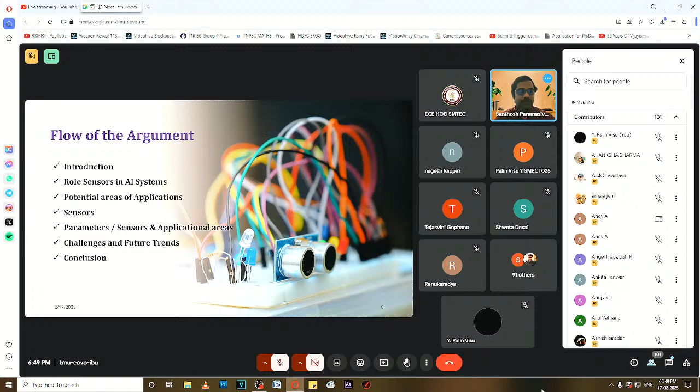So the first thing: in the era of AI, sensors play a very crucial role as a primary interface between the physical world and intelligent systems, right? They enable AI-driven applications by collecting real-time data, which is then processed, analyzed, and used for decision making. This is very similar to our five senses, through which our brain gets data and then synthesizes and analyzes the data and makes decisions. Sensors act the same way and are helpful for us as far as automation and other things are concerned.

What is a sensor, first of all? Sensors are devices that detect physical, chemical or biological changes and then convert them into measurable signals. Fine. The primary role of these sensors is data collection. Sensors provide real-time data essential for AI decision making.

So without sensors, whatever AI system we have, it will not be able to make any decisions, because we are very much aware that all AI systems, whatever they could be, need some input. Even though it has a trained database, it needs some input to check the data. So data collection becomes very, very essential, and sensors play a very crucial part in that.

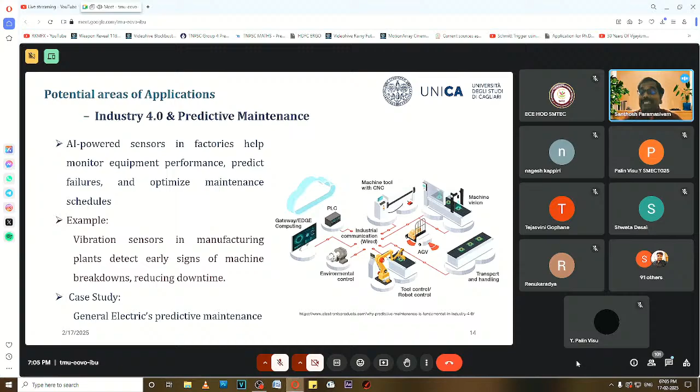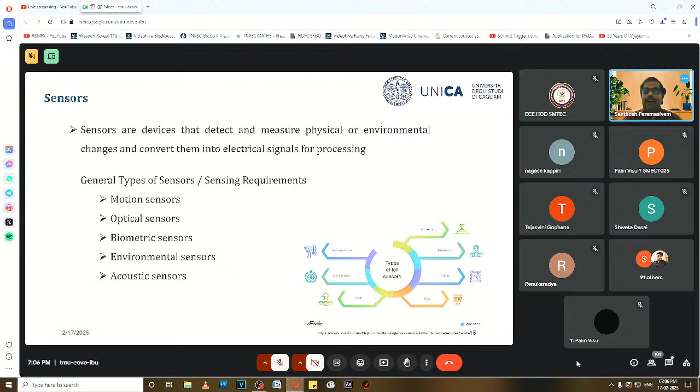So far we have seen the key areas of applications of these sensors integrated with AI. Now we are categorizing all sensors into these 5 major areas: motion, optical, biometric, environmental, and acoustic sensors. We will see what parameters are associated with these sensors and sensing applications, and what sensors we really use for this purpose.

The first is motion sensors. What do motion sensors detect? Is it just walking of a person, or no? No, it covers much more. The general sensors used for this purpose are accelerometer and gyroscope. These sensors were earlier used in flights, aircraft, and ships, but now they find applications in most areas, even in the cars we drive every day. The application has been extended and expanded to every area, which is why this comes as the first point.

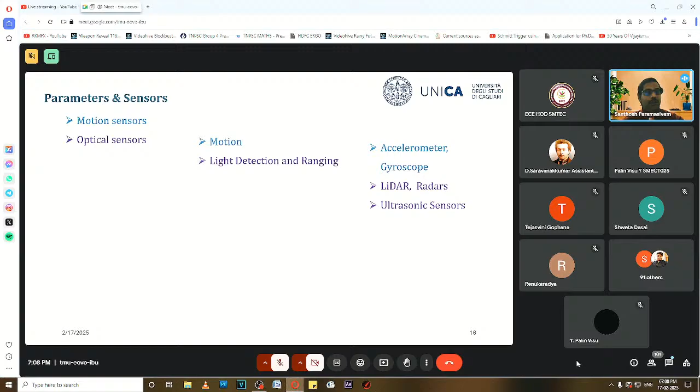The second is optical sensors. Optical sensors function through light detection and ranging. The sensors that come under this criteria are LIDAR and radar. The third is ultrasonics. Ultrasonics is used for ranging; it doesn't come under light, but for detecting ranging we use ultrasonic sensors.

Then the biometric sensors. Biometric sensors include facial recognition, fingerprint readers, and thermal readers. Thermal readers here refer to smartwatches and other devices where it detects your bodily temperature and other parameters.

That is what the thermal reader here means. General sensors which we use here are the fingerprint, iris, and ECG sensors. These are the three primarily used biometric sensors.

Then comes your environmental sensors. What are the parameters read by these environmental sensors? The common things are pressure, temperature, humidity, and chemical composition or chemicals. By chemicals, I mean the pollution part, air pollution and related things. Gas sensors are used in this case. So here comes the temperature sensor, the humidity sensor, and the gas sensor. These are the prime sensors which come under environmental monitoring, right?

And then are the acoustic sensors. When it comes to acoustic sensors, the prime thing it senses is sound. Here again, microphones and ultrasonic sensors come into picture in this area as well. So this is the general parameters or general areas which we have, and the sensors that are being used, and the parameters that are being measured. This generalized sensor purpose is given here.

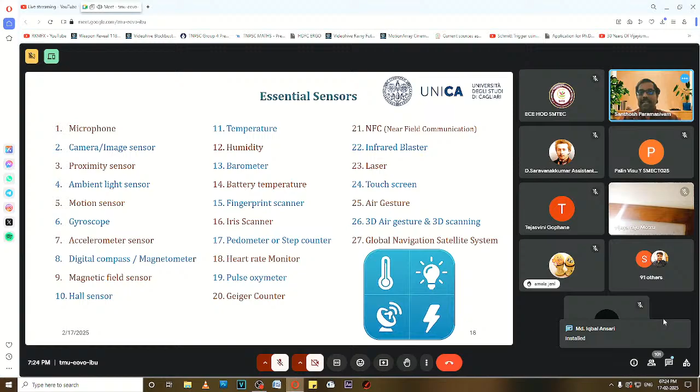Nice, nice, nice. Why I was asking you to do that is that these are the sensors that we have in our smartphones. So now you could imagine simply that these are the sensors which we have in our own smartphones, with which we will be able to develop any application. If you go there, you will find all the accelerometers, gyroscope, everything is there.

Please open the app and see.

So when you open the app, you would get a list of sensors that is there in your mobile phone. Maybe all the sensors listed here are not there in your mobile phone, but definitely you will see an accelerometer, a geomagnetic field, orientation, gyroscope, proximity, a gravity sensor, linear acceleration, rotation vector sensor, and a step counter.

Then your battery monitoring things. If you go there, you will know what is the temperature of your battery, what is the voltage, what is the status, whether it is charging, the health of your battery, as well as the type of battery that is being used in your mobile phone.

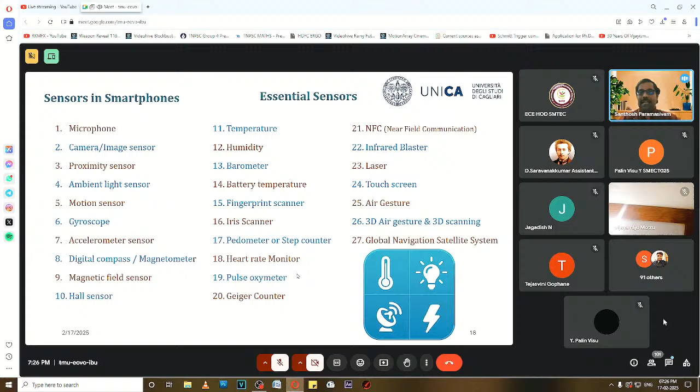The geomagnetic field will tell you what is the magnetic field around you, in your x-axis, y-axis, z-axis. Just move it near your laptop, you can see it will be higher. If you move it away, or when you are inside a Wi-Fi field, your magnetic field will be different. The field strength tells you what field you are in, whether the impact is going to be higher or lower. All these things you can analyze with this.

This is an ultimate tool which will tell you the various parameters around us. There are many other tools as well, but this one app will give you the exact details of everything. It gives you all the sensors in your phone.

Next, there would be a question. Now everything is okay, we have seen about the different sensors and how these can be used for different applications. We also saw some sensors which I myself have in my smartphone. But what is the use of these sensors? How can I myself use it? I know my phone is using these sensors to do all the required functions. How can I customize these sensors? I want to use it for myself, how can I do that? Is it possible for me to control my sensors, to make a modification with them? That will be the next question that comes to our mind. Is there any way we can do this? Yes, of course, there is a way we can control these sensors.

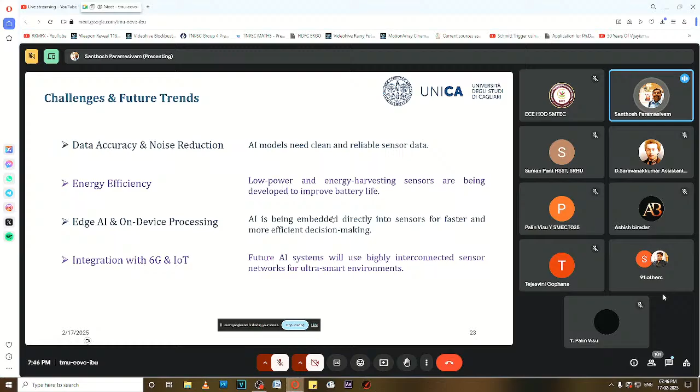Finally, coming to the conclusion of what we are trying to do. In this AI era, sensors are fundamental for enabling intelligent systems across industries. Their integration with AI is revolutionizing fields like healthcare, smart cities, industrial automation, and autonomous mobility. As sensor technology advances, AI-powered solutions will become more efficient, sustainable, and responsive to world challenges. This is the conclusion of today's presentation.

Also, we have seen different things today with which we ourselves can utilize the sensors which we have with us. In this I have not included your smartwatches, where you have more health monitoring sensors. There are more health monitoring sensors in your smartphones and smartwatches which I have not given here, but most of the functions your smartwatches are doing can be done with your smartphones itself. That you could have understood with the list of sensors which I have shown earlier.

Also this MIT App Inventor, if you see, there is a list of sensors. From there also you can identify that there are a lot of things that can be done with what you have. So my suggestion would be, try to use that, try to build your own applications, try to build your own AI systems, try to contribute yourself.

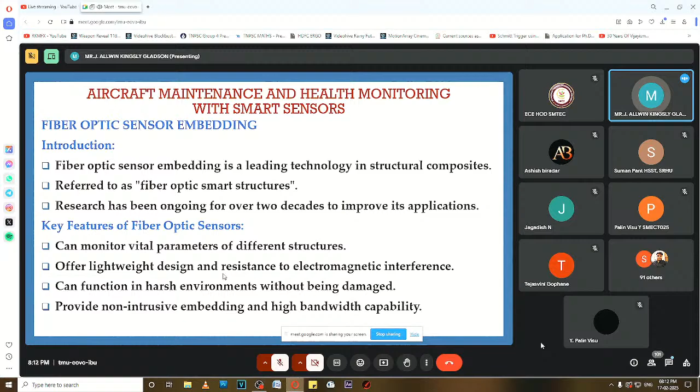The key features of fiber optic sensors are that they can monitor vital parameters of different structures. They offer a very lightweight design and resistance to electromagnetic interference. They can function in harsh environments, weather and climate conditions without getting damaged. They provide non-intrusive embedding and high bandwidth capability. The main advantages are high bandwidth capability and resistance to electromagnetic interference.

Its function is that it enables real-time health monitoring of the structure. It can be embedded during manufacturing or applied during operation. It works similar to human senses like hearing, seeing, smell, taste, and touch to detect structural conditions. All 5 senses we can use to detect the structural conditions of the aircraft. It provides instant data on the health, ensuring early detection of damage.

Because instant data, nanosecond response recording of the data, will help us to detect damage or failure as early as possible. Fiber optic sensor disadvantages: high fabrication cost makes them expensive to implement. They are very fragile in nature, which makes them prone to damage. Due to the fragile nature, on exposure to anything harsh, it will get damaged. So it will be embedded or safely placed in the aircraft structure.

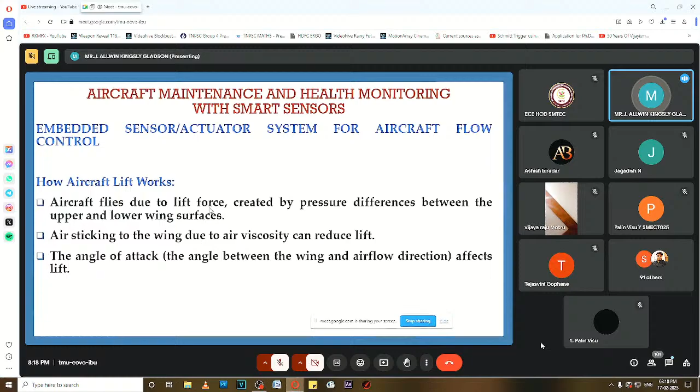Then, working of the aircraft. The aircraft flies due to the lift force. The lift force is created by the pressure difference between the upper and lower wing surfaces. Air sticking to the wing due to air viscosity can reduce the lift force. The angle of attack, meaning the angle between the wing and the airflow direction, affects the lift. Once again, the aircraft flies due to the lift force, created by the pressure difference between the upper and lower wing surfaces. Air sticking to the wing due to air viscosity can also reduce the lift force. The angle of attack affects the lift.

The next one is flow separation, the embedded sensor for aircraft flow control. At low speeds and high angle of attack, air separates from the wing, reducing the lift. At very low speed, if the angle of attack is very high, air separates from the wing, reducing the lift. Unsteady airflow during maneuvers can cause early flow separation, leading to loss of lift. Flow separation affects aircraft performance and safety, making it essential to predict and detect.

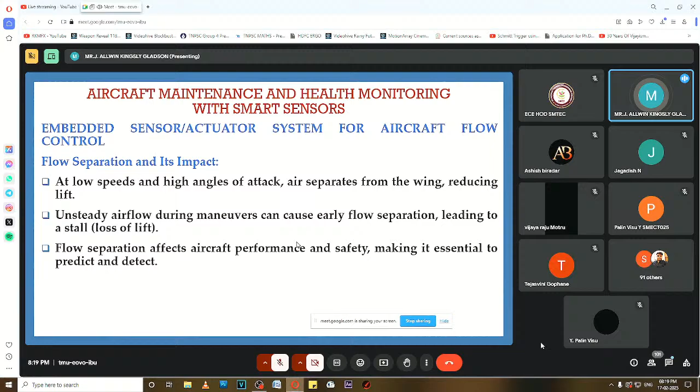So we have to detect early whether the correct flow is happening at the wing to lift the aircraft or not. Flow separation is monitored with network-based pressure sensors embedded in the wing. They measure pressure fluctuations to detect flow separation. These pressure variations are analyzed using the root mean square value of the signals from the sensors. These signals increase in laminar separation bubbles and decrease after reattachment. Initially it increases, and after reattachment it decreases.

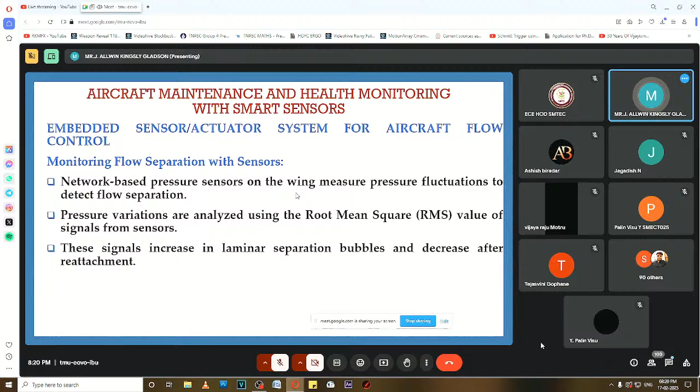Then, embedded sensors for aircraft flow control. The experiment setup used the ATR 72 aircraft, a twin-engine regional airliner, for testing the airflow over the wings. CFD, computational fluid dynamics simulations, help determine optimum sensor placement, that is, which area of the wing we have to place the sensor to get correct flow separation data. Results were validated using a standard airfoil cross section, a standard aircraft wing design.

Then, capacitance-based pressure sensor design, used for aircraft flow control. Capacitance-based pressure sensors were chosen for their very low cost and large area coverage. The sensor design used a deformable membrane and a movable electrode, both placed on a copper clad polyimide layer. Finite element method simulations were used to analyze sensor deflection and stress distribution.

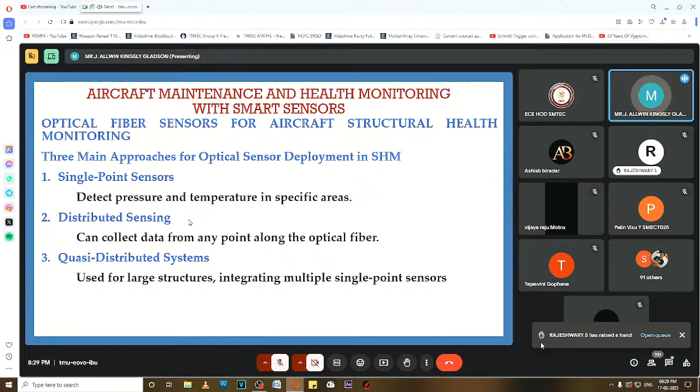The three main approaches for optical sensor deployment in structural health monitoring are single point sensors, distributed sensing, and quasi-distributed systems. Single point sensors detect pressure and temperature in a specific area. In distributed sensing, it can collect data from any point along the optical fiber. Quasi-distributed systems are used for very large structures, integrating many single point sensors. These are the three main approaches in structural health monitoring using optical sensors.

The next one is sensors in electric vehicles. There are battery powered electric vehicles, called electric vehicles, and hybrid electric vehicles, which have more than one source of energy used to drive the vehicle. What are the sensors used in electric vehicles? Position sensors, speed sensors, temperature sensors, and pressure sensors. Some electric vehicles use a very small engine only to charge the battery. Therefore, it will reduce the number of sensors to be used.

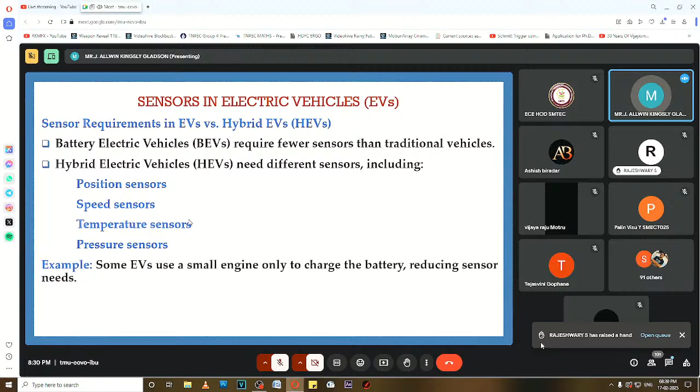Common sensors on electric vehicles are temperature sensors, voltage sensors, and current sensors. The temperature sensor is used to monitor the heat of the battery and the motor. The voltage sensor is used to measure the power levels of the battery. And the current sensors track the electrical flow in the system.

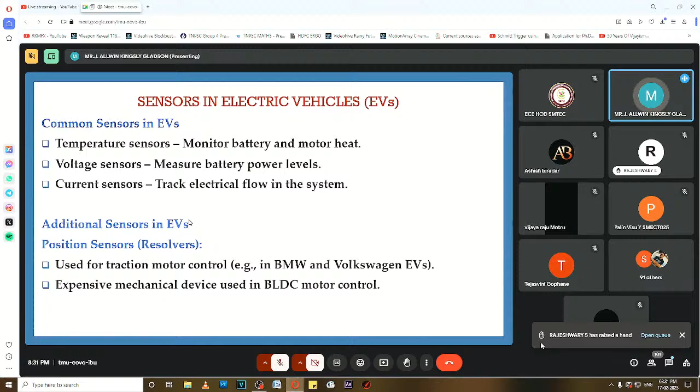The additional sensors in electric vehicles are position sensors, called resolvers. They are used for the traction motor, so the motor can be controlled. For this, we can use position sensors. For example, BMW and Volkswagen electric vehicles use this position sensor. It is an expensive mechanical device used in brushless BLDC motor control systems.

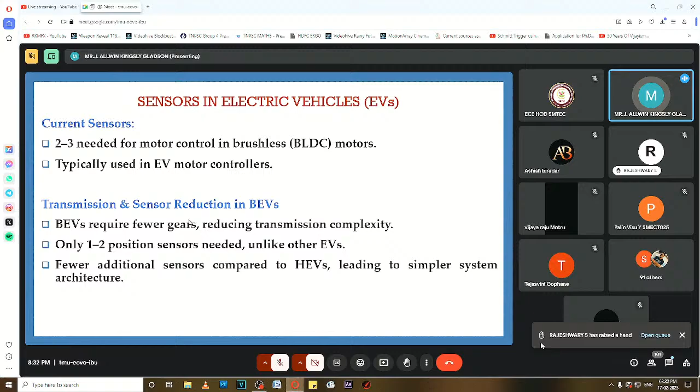Current sensors: a minimum of 2 or 3 sensors are needed for motor control in brushless BLDC motors. They are used in electric vehicle motor controllers. Transmission and sensor reduction in BEVs, battery powered electric vehicles: they require fewer gears, reducing the complexity of the transmission. Only 1 or 2 position sensors are needed. Fewer additional sensors are needed compared to hybrid electric vehicles, leading to a simpler system architecture.

Position sensors in automotive systems. What is the purpose of position sensors? They are used to measure mechanical angular motion and convert it into electrical signals. They are designed to work in the harsh environmental conditions found in automotive systems. Based on the electrical signals, the position of the wheel and the motor is determined.

Types of position sensors: rotary position sensors, also called angle sensors, measure rotational movement accurately. The common sensor used for motor control is the resolver. It is used for precise motor position tracking, to know what position the motor is in now. The next one used for motor control is the encoder. It converts the motion of the motor into digital signals and passes the signals to the control system of the motor.

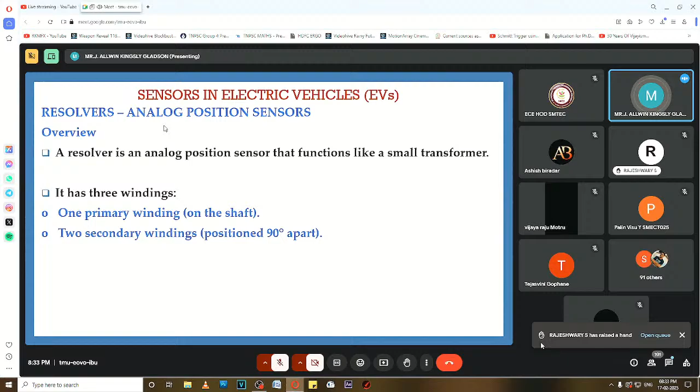Purpose of the resolver. This is called an analog position sensor. It functions like a small transformer. It has 3 windings: one primary winding, located on the shaft, and 2 secondary windings positioned 90 degrees apart from each other. Its working principle: it measures the shaft rotation by calculating the turns ratio and polarity between the coils.

It functions like a rotary transformer. It detects angle variation when the shaft rotates. It uses an AC reference voltage to excite the coils at a constant frequency. The output frequency from the stator and rotor remains the same, but differs in phase by 90 degrees. It generates sine signals and cosine signals, where the voltage depends on the reference voltage and the shaft angle.

It uses AC reference voltage to excite the coil at a constant frequency. The output frequency from the stator as well as from the rotor remains the same, but differs in phase by 90 degrees. It generates sine and cosine signals, where the voltage depends on the reference voltage and the angle of the shaft.

Then encoders - these are motor position sensors. What are the different types of encoders? First is the absolute position encoder, and the second is the incremental encoder with the reference mark.

In the absolute position encoder, it uses a disk with a specific binary pattern. If it is a 3-bit output, it has 8 pattern positions. It is useful when power turns on and off intermittently during operation. Then we can use this absolute position encoder.

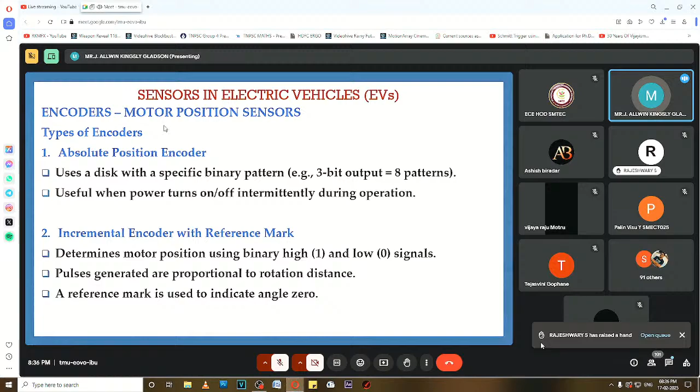Then the incremental encoder with the reference mark. The previous one is the absolute position encoder; this one is the incremental encoder with the reference mark. It determines motor position using the binary high and low, 1 and 0 signal. The pulses generated by these encoders are proportional to the rotational distance. A reference mark is used to indicate angle 0 in this sensor.

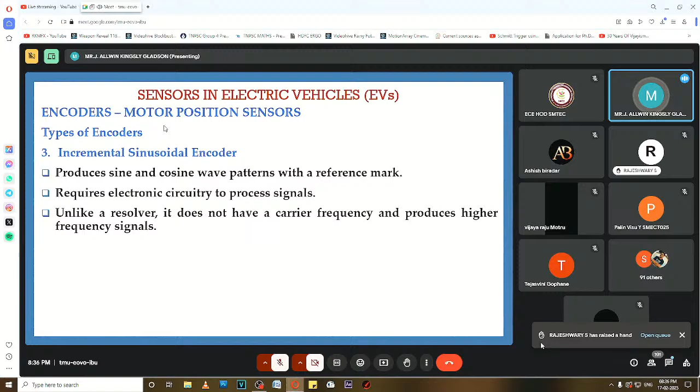The last one is the incremental sinusoidal encoder sensor - this is also a motor position sensor. It produces a sine wave pattern and a cosine wave pattern with a reference mark, the 0 mark. It requires an electronic circuit to process the signals. Unlike a resolver, it does not have a carrier frequency; it produces only higher frequency signals.

The next sensor in electric vehicles, apart from motor position sensors, is the battery monitoring sensor. It is essential for electric vehicles. It monitors battery health and state of charge, the charge level. It is typically used with 12-volt lead acid batteries.

The key components of these battery monitoring sensors are analog devices; the second is the shunt resistor. These sensors are placed on the battery module for real-time monitoring. Three main measurements are taken with the help of the sensors from the battery: first is voltage, the second is current, and the third is temperature.

For voltage, each battery cell has a voltage measurement chip. It is most critical.

Next is current - the current is measured using shunt resistors or open loop Hall sensors. Then temperature is measured using NTC thermistors, the negative temperature coefficient thermistors.

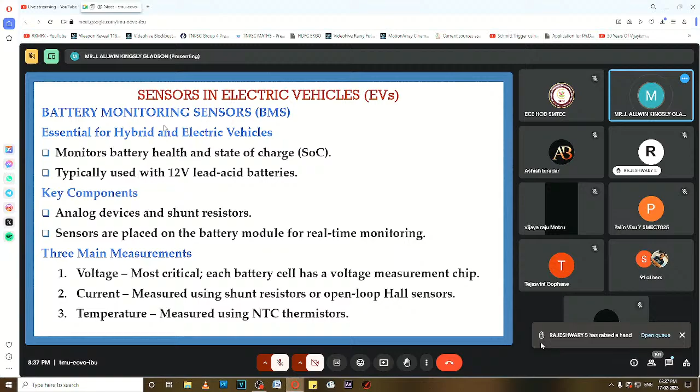Then MEMS technology in automotive vehicles. It is widely used in modern vehicles. MEMS technology is used in airbags and vehicle stability control. The four main types of MEMS-based sensors are: first, accelerometer; second, gyroscope; third, inclinometers; and fourth, flow and pressure sensors.

What does accelerometer mean? It detects motion and impact - the movement of the vehicle, motion surrounding the vehicle, and the impact of a surrounding body with the vehicle. Then gyroscopes measure vehicle rotation and stability, such as during turning or steep turning, when the vehicle goes at high speed around a curve.

Then inclinometers detect tilt and angle changes in the vehicle. Then flow and pressure sensors monitor fluid movement and air pressure - fluid movement meaning fuel flow as well as brake oil flow and engine oil flow.

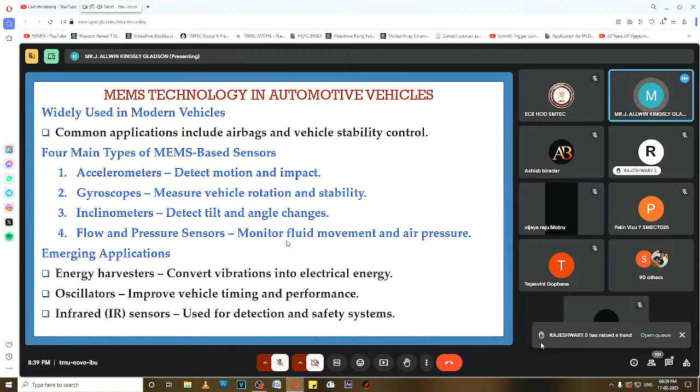Next is MEMS-based sensors for passenger safety. For the prevention of collision, we have to deploy the airbag. For the deployment of the airbag, we use this MEMS-based sensor. It detects rapid changes in vehicle acceleration and automatically deploys airbags to reduce the impact. Then, MEMS based accelerometer in airbags.

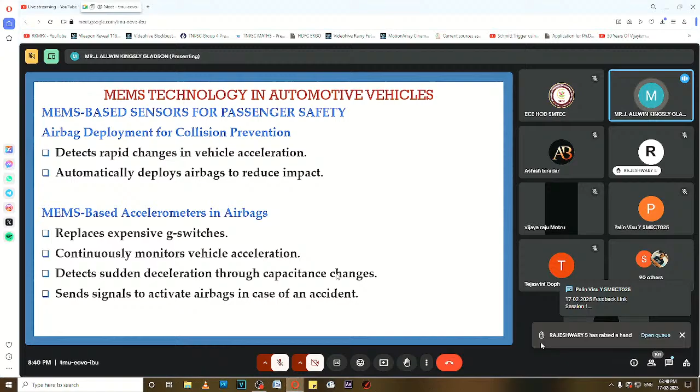In traditional methods, G switches activate the airbags, but this MEMS-based sensor replaces the G switches. The accelerometer continuously monitors the vehicle acceleration and detects sudden deceleration through a change in capacitance value. If the capacitance value changes, it detects the sudden deceleration and sends a signal immediately to activate the airbags.

Use of the MEMS gyroscope: this MEMS-based sensor is used for skidding and rollover reduction. To avoid rollover of the vehicle and skidding, we use this MEMS gyroscope. It measures the angular velocity of the wheel and helps maintain the vehicle's orientation with the surface of the road as well as the wheel of the vehicle.

Its working principle is based on the conservation of momentum. This MEMS micro gyroscope works on this principle and is commonly used in trucks for rollover reduction, hence improving vehicle stability and safety.

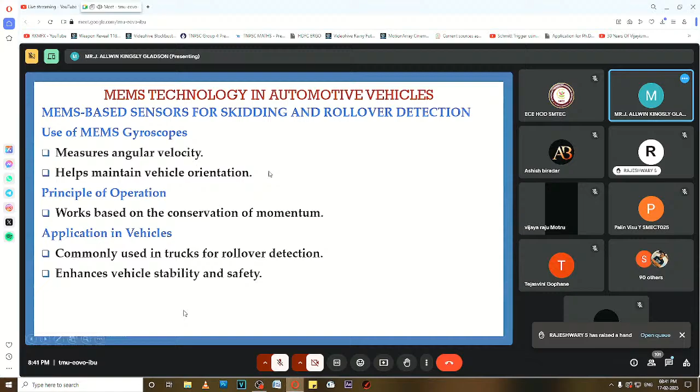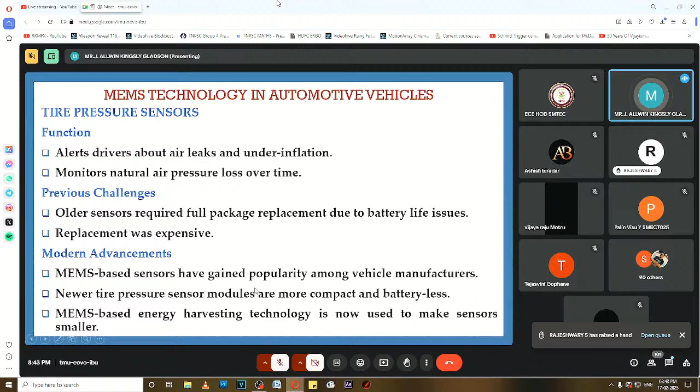The challenge with older sensors was full package replacement due to battery life issues, since the sensors were operated by battery. If the battery life expired, the whole sensor system had to be replaced, which was very expensive. In modern advancement, MEMS-based sensors have gained popularity among vehicle manufacturers because the newer tire pressure sensor modules are more compact and battery-less—they do not use any battery and are very small in size. This MEMS-based energy harvesting technology makes the sensor smaller since no battery is used, and it is gaining more popularity in tire pressure sensing.

Then there is electronic stability control of the vehicles. Why is it important to use electronic stability control? It helps drivers maintain stability and control during a sudden movement or jerk of the vehicle.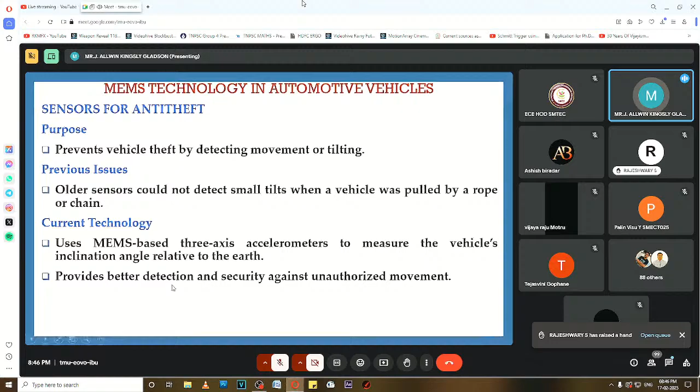But current technology uses MEMS-based 3-axis accelerometers to measure the vehicle's inclination angle relative to the earth, providing better detection and security against unauthorized movement.

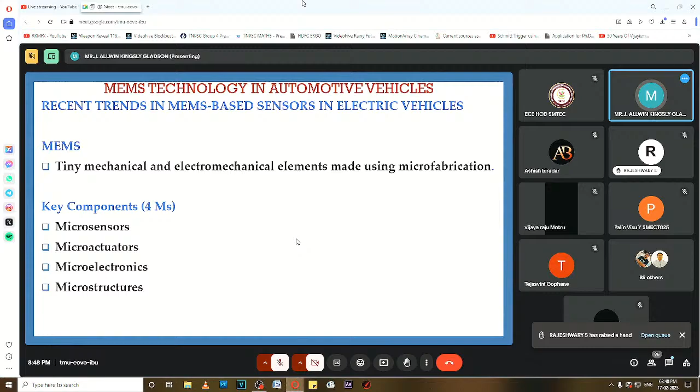MEMS: tiny mechanical and electromechanical elements made using microfabrication, called MEMS. Key components are the 4 M's: one is microsensor, another is micro actuators, third is microelectronics, and the fourth is microstructures. The benefits of MEMS technology are very low cost, high reliability, and better performance than other microscopic sensors.

Role in electric vehicles and hybrids. Role of MEMS technology in electric vehicles: it converts mechanical signals into electrical signals. It is mostly seen in complex sensor integration, therefore it is mostly seen in high-end model cars only.

Why do we need to monitor batteries? Charging and discharging causes electrical and mechanical changes in the battery. While charging and discharging, electrical and mechanical changes happen in the batteries. Due to these changes, the battery can fail. So to prevent this failure, we use MEMS in the battery monitoring system.

Common battery failure causes are malfunction in electronic components, overheating during charging, and connector failures. Malfunction in the electronic components will cause the battery to fail. Overheating during charging also causes the battery to fail. The connector between the battery and the power source also makes the battery fail.

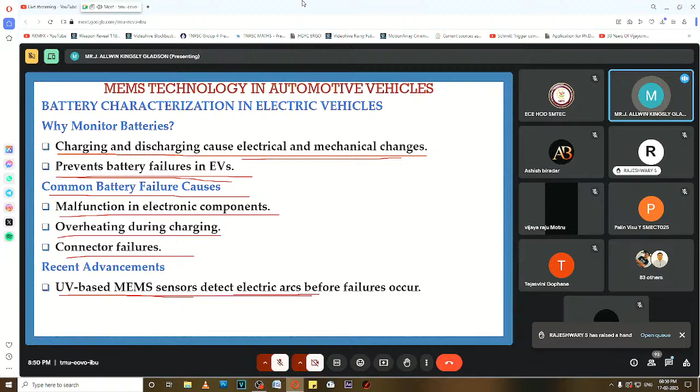The future of EVs: EVs are the future market and replacement for conventional vehicles. They help reduce greenhouse gas emissions and global warming.

Sensor-based technologies in EVs: various sensors are used in EVs. Some sensors are also common in conventional vehicles. This MEMS-based sensor - new micro-fabricated sensors are being developed for electric vehicles.

These MEMS-based sensors in electric vehicles are used for motion sensing, battery monitoring, and energy harvesting. This sensor will reduce the cost, save space, and improve sensing capabilities.

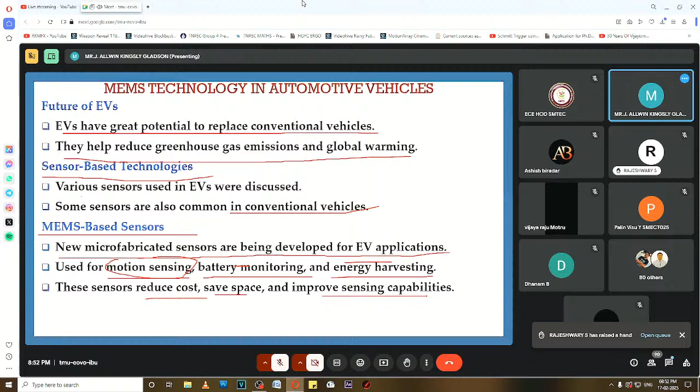Sensors used in automobile manufacturing. An automobile manufacturing shop is called an assembly shop, and it has sensor integration. Importance of the assembly shop: it converts the vehicle frame into the final product. Initially only the vehicle frame is present, and finally it is converted into the final product. This is one of the most crucial parts of automobile manufacturing.

There is high cost investment in equipment, because flexible manufacturing system machinery, robots, and automation process can be more expensive than the final product.

The role of the sensor in assembly is to protect equipment from damage, because automation equipment moves in precise motion with each other, so it should protect equipment from damage.

It ensures smooth and efficient processing. For automation, smooth and efficient processing is needed, and that needs sensor integration. The assembly shop has one station integrated with another station, and one automation machine integrated with another machine. So for correct integration, sensors are used.

Smooth and efficient processing also helps maintain high quality standards through automation.

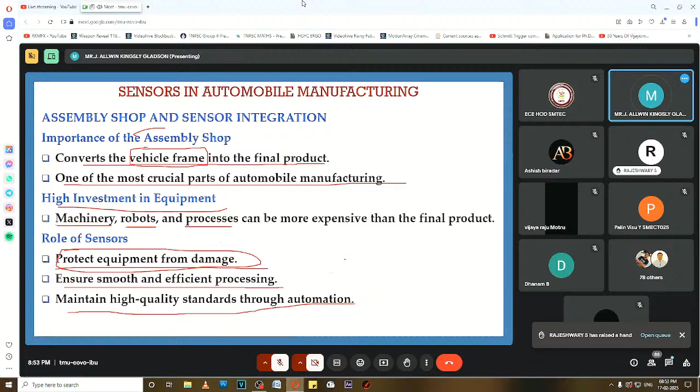An assembly line is a production process where manufacturing is divided into a number of sub-steps. Each step follows a fixed sequence to ensure the product becomes a final product. The product moves from one workstation to another workstation for different tasks.

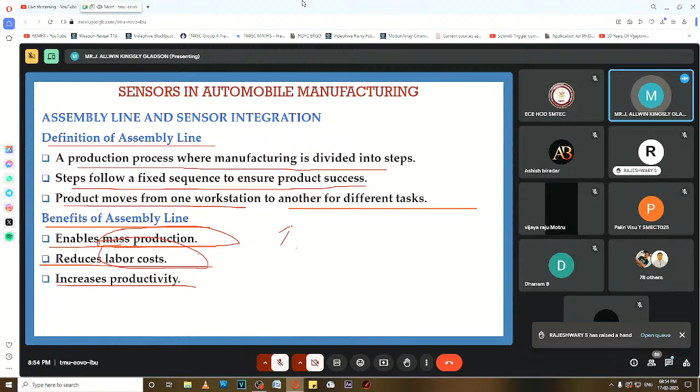Benefits of the assembly line: it enables mass production, reduces labor cost, and increases productivity. At one point of time, more parts and more vehicles can be manufactured. With the same labor, using mass production we can increase the number of vehicles and also increase productivity.

In assembly line and sensor integration, another factor is automation and optimization. From one station to the next, products or components must be moved, so we use conveyor belts. Conveyor belts reduce vehicle production time, since they move parts or components from one station to another. The process is divided into multiple steps for efficiency.

Movement of parts via conveyor belts reduces human usage. Therefore, automation reduces health risk and improves the productivity of the component.

Role of sensors in modern assembly lines: it is essential for balancing human and automated systems, because the assembly line consists of different workstations. At workstations 1, 2, 3, there will be human beings, and these humans and machines should be balanced and coordinated equally based on sensors on the machines. The human must react or perform operations in the assembly line.

Sensors also optimize material handling and energy usage. Optimizing material handling means that once an operation or task is completed, the conveyor carrying the component moves to the next workstation. When the operator places the finished task at the sensor location, the sensor sends a signal and the conveyor moves to the next workstation.

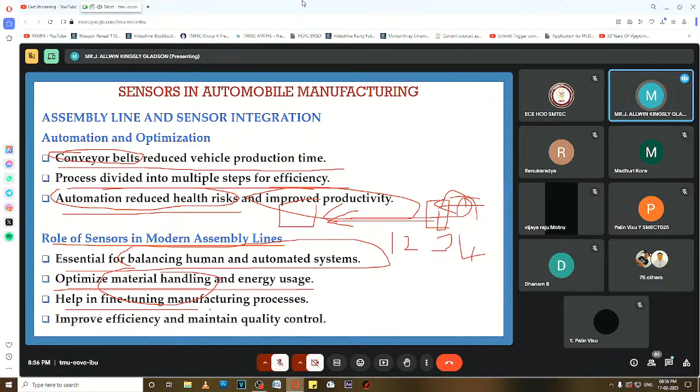This optimization of material handling helps in fine tuning the manufacturing process, meaning various operations are carried out simultaneously on a particular component using different tools. For example, a first tool, second tool, and third tool must not interfere with or disturb each other. This fine tuning of the manufacturing process is achieved with the help of sensors.

This improves efficiency and maintains quality control. If it balances human and automated systems, efficiency automatically increases. If it optimizes material handling, efficiency automatically increases. If it fine tunes the manufacturing process, quality automatically improves.

Importance of the assembly line: it is very essential for mass production in the automobile industry. It helps manufacturers work cost efficiently by moving through different processes, reduces the need for skilled labor, increases efficiency, and reduces production time and cost.

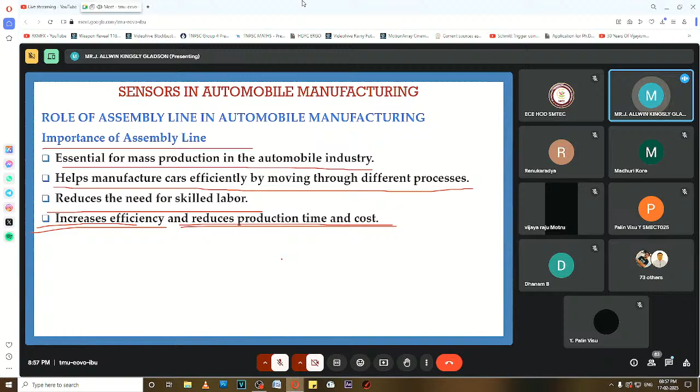Role of the assembly line: the main sections of the automobile assembly line are the body shop, paint shop, and assembly shop. In the body shop, main vehicle components are manufactured, including processes like casting, sheet metal work, pressing, and welding. In the paint shop, components are painted as per requirements. First, in the body shop, components are manufactured using these manufacturing methods.

These are the manufacturing methods. Then paint after the body shop, the parts are manufactured. It is painted in the paint shop, and in the assembly shop, final assembly of the vehicle takes place.

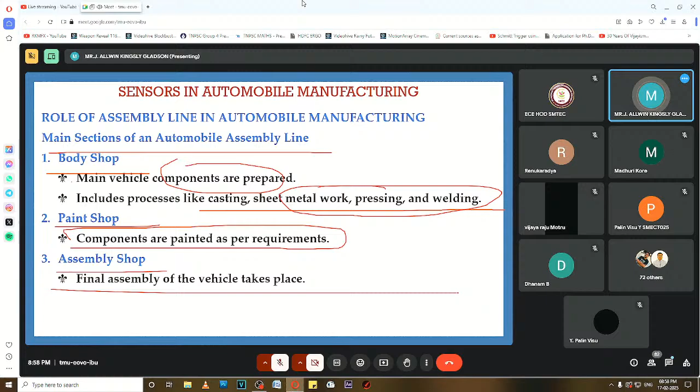The next one is the assembly line. Types of lines in the assembly shop: first is trim line, second is chassis line 1, third is chassis line 2, and the last one is final line.

What is the role of sensors in the assembly line? Sensors are used for integrating different sub-assemblies. It ensures proper alignment and functionality of the components. The proper alignment of components is done with the help of sensors only. If it is properly aligned, the function of the components will work properly, reducing defects and rejection in final inspection.

If it is using a sensor-based tightening and nut tightening system, and a sensor-based press fitting system, this also helps in the final inspection, so the number of component rejections will be very less due to this sensor-based assembly line system.

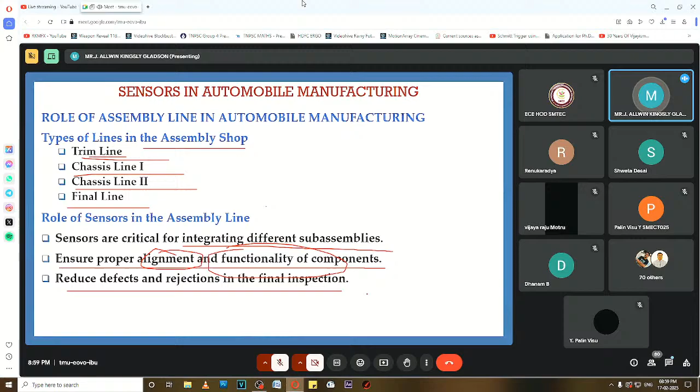Next is the first stage, the trim line, in the assembly shop. Here the vehicle arrives from the paint shop. Several sub-assemblies like brakes, console box, cabin lamp, and door assemblies are prepared here.

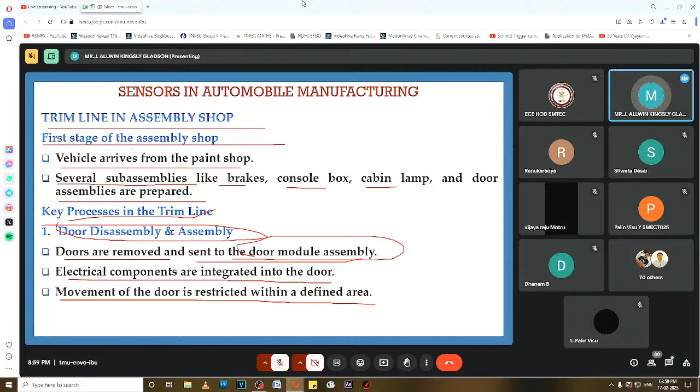Key process in the trim line: the first process is door disassembly and assembly. Doors are removed and sent to the door module assembly. Electrical components are integrated into the door, and movement of the door is restricted within a defined area.

Then the second key process in the trim line is dashboard installation. The dashboard is selected from the lot in the nearby storage area and installed in the vehicle.

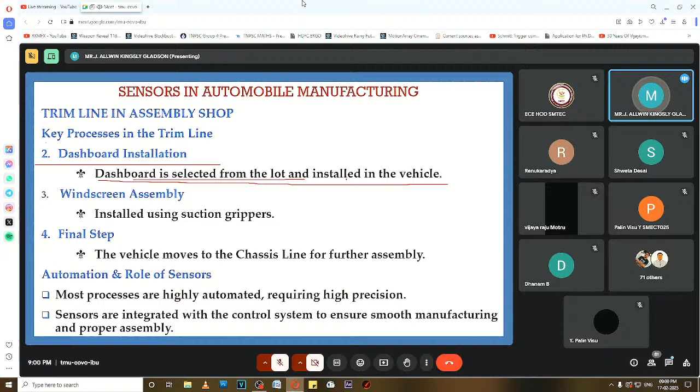Then windscreen assembly is installed using suction grippers. The windscreen, the front window of the car or vehicle, is installed using suction grippers. By the vacuum grippers, the windscreen is held secured and fit on the front of the vehicle, located securely in the proper location with the help of sensors.

The final step: the vehicle moves to the chassis line for further assembly.

The role of the sensor here is that most processes are highly automated, requiring high precision. In the assembly line process of automobile manufacturing, it is highly automated, meaning the machine with various limbs and arms moves precisely. For precise movements, we need these sensors so that parts will not collide with each other, and at the same time, they should be properly located.

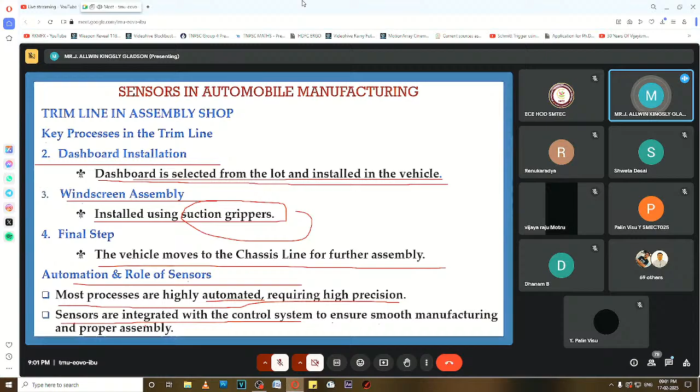Sensors are integrated with the control system to ensure smooth manufacturing and proper assembly.

Then the code reader in the assembly process. What is the purpose of the code reader? Its main function is to read coded tags to match the different assemblies of the vehicle.

Each sub-assembly or component has a different coded tag. You have to read and understand the particular code for the particular component, and ensure the correct placement of that component in the sub-assembly of the vehicle. Therefore, the main function of the code reader is to identify the particular component and correctly place it in position within the sub-assembly with the help of the sensor.

Use of one-dimensional and two-dimensional tags prevents confusion by labeling components with unique codes. Each and every component has a unique code, and by reading that tag, we can identify the components without any confusion.

Its working principle uses light absorption techniques, based on the difference between black and white colors. In a barcode reader, white reflects most of the light while black absorbs most of the light. A patterned tag of black and white reflects light in a specific way, allowing easy decoding, which helps identify and understand the component.

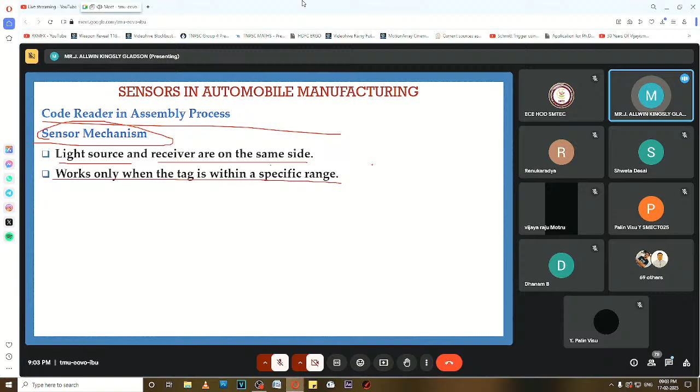The code reader in the assembly process uses a sensor mechanism. The mechanism consists of a light source and a receiver on the same side. It works only when the tag is within a specific range from the light source.

Then the inductive sensor in the assembly process.

This inductive sensor, the main function is it detects and monitors the position of the components. It detects as well as monitors the position of the components. It is used for precise positioning of the components.

Its working principle is based on changes in the inductance value of the PCB coil. AC current flows through the PCB coil, generating a specific inductance value. When an object comes near the coil, the inductance changes.

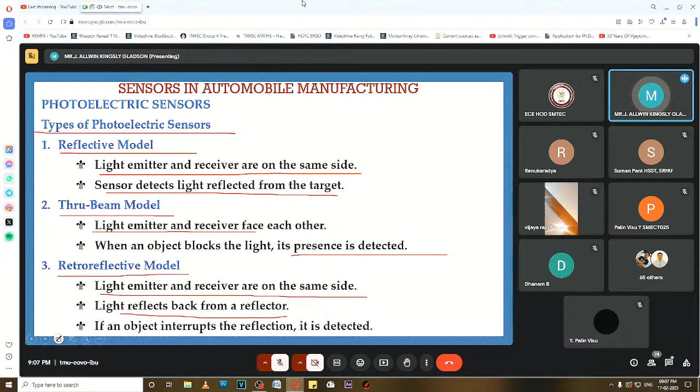Then pressure sensor. What is the main function of the pressure sensor? The main function is to monitor the suction pressure of the grippers. The suction pressure gripper is used to install the windscreens. It is essential for transferring the components to install the windscreen. The working principle uses different sensing methods like inductance or capacitance change.

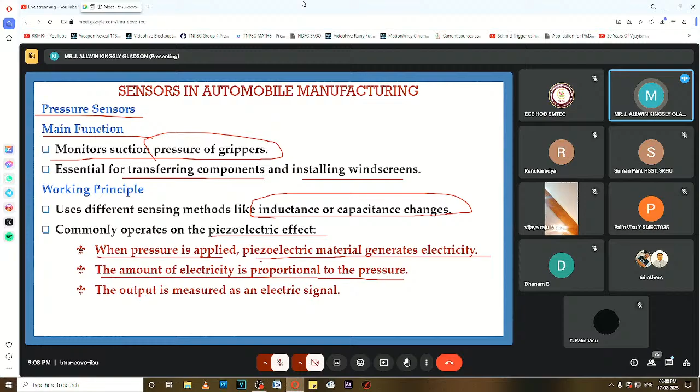It commonly operates on the piezoelectric effect. When pressure is applied, piezoelectric materials generate electricity. The amount of electricity is proportional to the pressure. The output is measured as an electrical signal.

Then chassis line 1. In the automobile assembly shop, the next station is chassis line 1. It integrates key components like suspension, silencers, and fuel tanks. It ensures quality assessment and monitoring before the assembly. First process is suspension system.

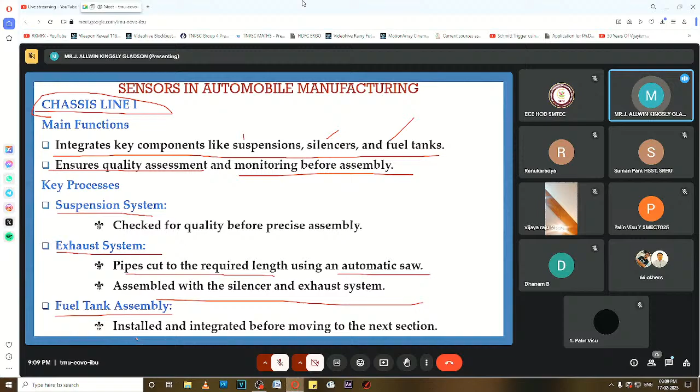The second process is exhaust system, and the third process is fuel tank assembly. In the exhaust system, pipe is cut to the required length using an automatic power saw and assembled with the silencer and the exhaust system. Fuel tank assembly: it is installed and integrated before moving to the next assembly section.

Here in the chassis line, what is the role of the sensor? It maintains smooth workflow and precision assembly. Precision assembly means precisely locating the silencer, all the exhaust system and the suspension system. It provides real-time monitoring and feedback. In a real-time assembly system, we can get the real-time data and feedback for correct positioning of the components.

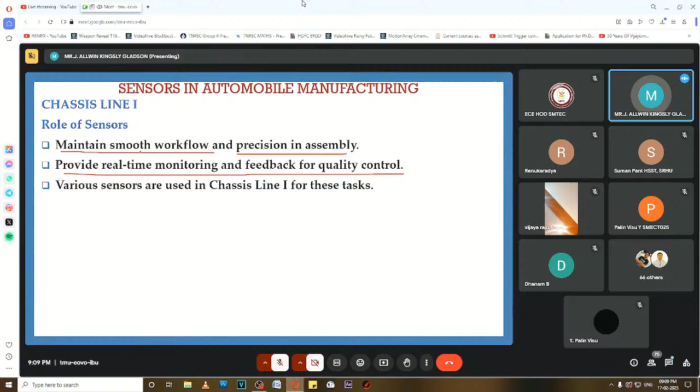Various sensors are used for this task. First one is the vision sensor in the chassis line. It accurately locates the brake disc during the assembly. Its working principle is it captures an image with a camera and processes it using a monochrome model. Light and dark areas are identified to determine the exact shape and the position.

It uses a black and white sensor. This vision sensor uses a black and white sensor because only minimum color variation is needed in the chassis line. It captures a black and white image using a monochrome model. The light and the dark areas are identified to determine the exact shape and position of the object.

The fixed camera allows continuous monitoring of the component position; the camera is always fixed and the component is moving across the camera. Unlike other sensors, vision sensors support multi-point inspection, enhancing the accuracy. Therefore we can get very high precision accuracy.

Then the purpose of the capacitive sensor. Next to the vision sensor we use the capacitive sensor. The purpose is to monitor the release of the work step in the assembly process. Its working principle is it detects objects based on changes in the capacitance when they come into contact and sends data to the central control system, which then adjusts operations accordingly.

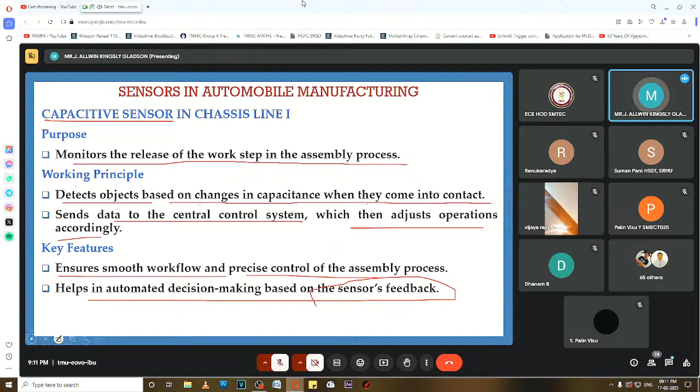The key feature of this capacitive sensor is smooth workflow and precise control. It helps in automated decision making based on the sensor feedback. Because in the chassis line one or more machines are working and machine parts are moving, they should not collide with each other. So the change in the capacitance value lets the sensor detect the position and size of the object, and it gives information to the central control system, then to the feedback system, then to the control unit to control the current operation according to the data.

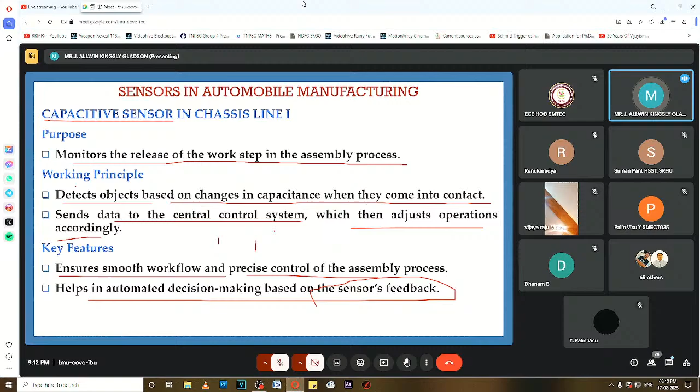Then laser sensor. It consists of a laser source and a receiver. Its application is for safety curtain and length measurement. Safety curtain means to stop the process if an object interrupts the laser beam, to prevent damage.

The length measurement ensures precise cutting of the exhaust pipe by guiding the automatic saw. For the silencer pipe, you get precise cutting; this laser sensor guides the automatic saw to precisely cut the silencer. Then key benefits: it enhances safety in restricted areas, and it improves accuracy in component measurement and cutting.

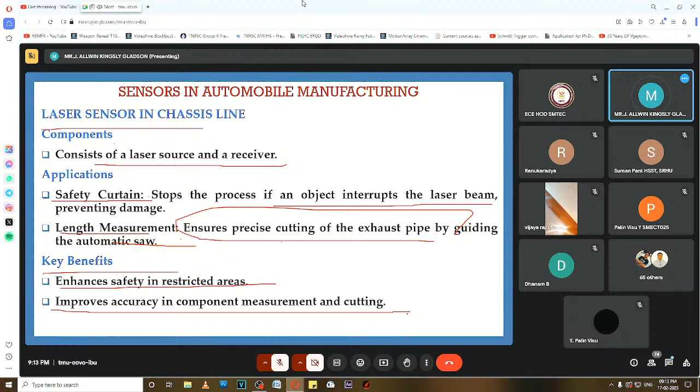Then drivetrain integration. Drivetrain integration is the mechanical power transmission system in the chassis. Drivetrain means engine, drive axle, disc and drum. Then cooling system: radiator, condenser, coolant pipes and blower connections. These are all integrated. The drivetrain installation is called mechanical marriage, as it connects major power transmission components. Then radiator, condenser and cooling system components are attached. Then fasteners: bolts, nuts, screws, rivets, ensuring stability.

The next one is the role of sensors in the drivetrain integration. It monitors the entire process for precision. It ensures correct placement and fastening of the components.

Then inductive sensor in chassis line 2. The purpose of this inductive sensor in chassis line 2 is it detects and monitors the position of the components. It ensures correct placement during the drivetrain integration.

Its working principle is, it measures changes in inductance when an object is nearby. When an object is nearing, the inductance value will change. So it will help in locating the components and fixtures accurately.

The importance of this inductive sensor is it ensures precise alignment of the drivetrain parts. Based on the sensor, it aligns the parts and puts the parts in the exact location. It improves assembly accuracy and efficiency.

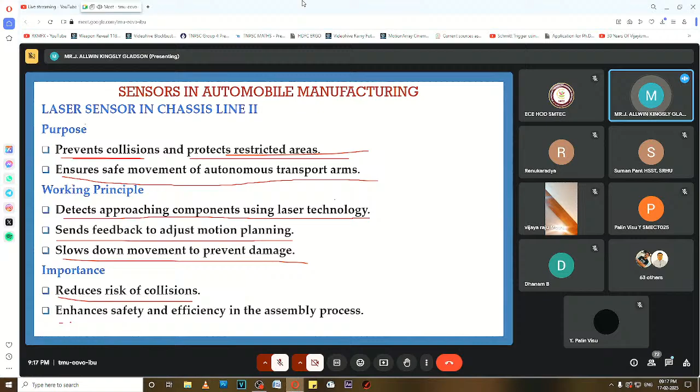The role of sensors in the final assembly section is bonnet check and final testing. Bonnet check means sensors confirm if the bonnet is open before the fluid filling. To fill the brake oil and fluids, the bonnet must be open. So the sensor confirms if the bonnet is open or not before injecting from the oil pump.

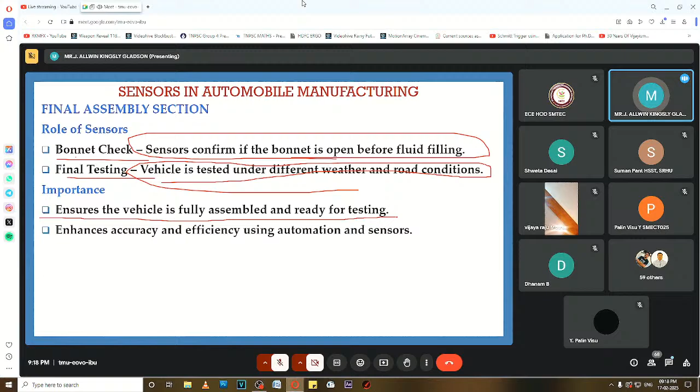Final testing: the vehicle is tested in different weather and road conditions. To get the data, we can use the sensors. It ensures the vehicle is fully assembled and ready for testing. Before testing, all the sensors are tested to get the correct data of the vehicle, whether all the components are attached or secured in the correct location. It gets the full data and enhances accuracy and efficiency using automation and sensors.

Then vision sensor in the final assembly. What is the purpose of the vision sensor? It identifies and matches the pattern of the wheel disc. It ensures correct wheel mounting. It identifies the wheel disc and matches the correct pattern of the wheel disc with the vehicle. Each and every vehicle has a different pattern of wheel disc. For the particular vehicle, you select the correct pattern of the wheel disc and ensure

the correct wheel mounting. Its working process is it captures the image of the wheel disc. Then it uses a monochrome model to analyze the pattern.

The pattern of the wheel disc is analyzed with the monochrome model and compares the detected pattern with the set standard. The machine has inbuilt standards to check whether this pattern of the wheel disc is suitable for this vehicle, comparing it to the standard pattern.

Once matched, the automatic screwing arm secures the wheel assembly. If it is not matched, the automatic screwing arm does not perform the operation and does not attach the wheel. So the importance is it ensures accurate wheel alignment and automates the fastening process for efficiency and precision.

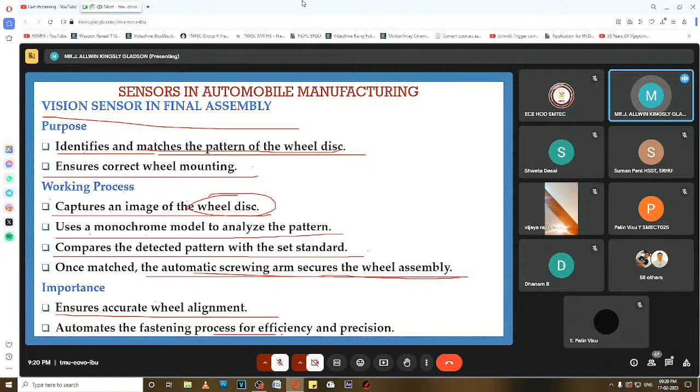Then the inductive sensor in the final assembly. What is the purpose of the inductive sensor? It detects parts and their exact location during the assembly, ensuring proper integration of the small components.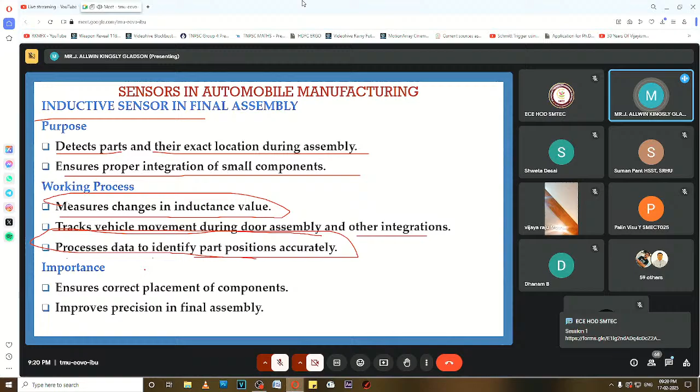Its working process measures the changes in the inductance value and tracks vehicle movement during door assembly and other integration. It processes data to identify part positions accurately, tracking vehicle movement during door assembly and checking whether the position of the part is accurate. It ensures correct placement of the components and improves precision in the final assembly.

Then the photoelectric sensor in the final assembly detects the state of the bonnet, whether open or closed. It identifies the presence of the vehicle at different stages.

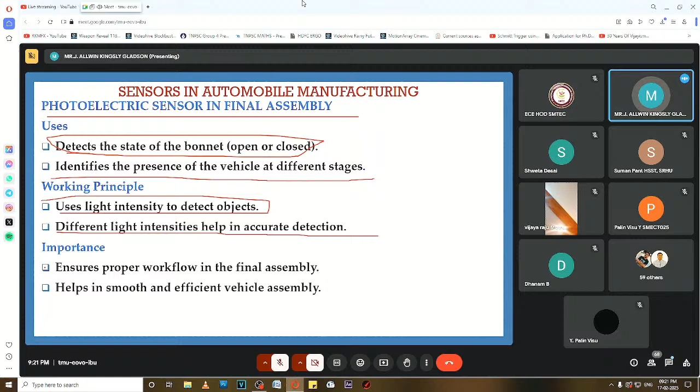Its working principle uses light intensity to detect objects. Different light intensities help in accurate detection of the component. This ensures proper workflow in the final assembly, helping in smooth and efficient final assembly.

Then the RFID tag identifies the correct seats for each vehicle, ensuring accurate seat installation. It uses radio frequency waves to detect the particular seat and read the seat information, then fixes it in the vehicle, preventing seat mismatching.

This is important because the front seat must be fitted in the front and the back seat should be fitted in the back. Likewise, it speeds up the assembly process.

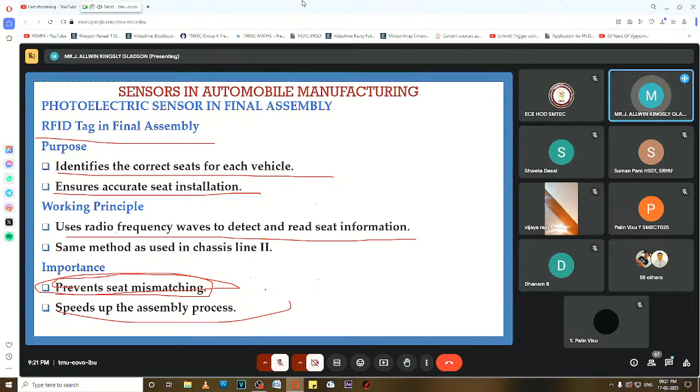Then the pressure sensor. What is the purpose of the pressure sensor? It monitors the suction pressure of the vacuum gripper, because the vacuum gripper is used to hold the seat, take it, and position it.

The vacuum gripper also holds the front windscreen glass of the vehicle, because proper pressure should be maintained. For taking the windscreen glass, the pressure is different, and for holding the seat, the pressure is different. So we use this pressure sensor to monitor the suction pressure.

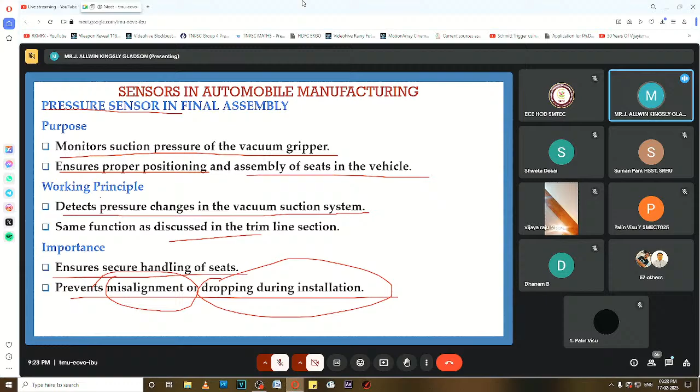This ensures proper positioning and assembling of seats in the vehicle. Its working principle is detecting pressure changes in the vacuum suction system, and the same function applies in the trim line. It ensures secure handling of seats and prevents misalignment and dropping during installation.

Then the flow sensor in fluid filling monitors the fluid flow rate during coolant and engine oil filling, helping calculate the exact amount of fluid to be filled.

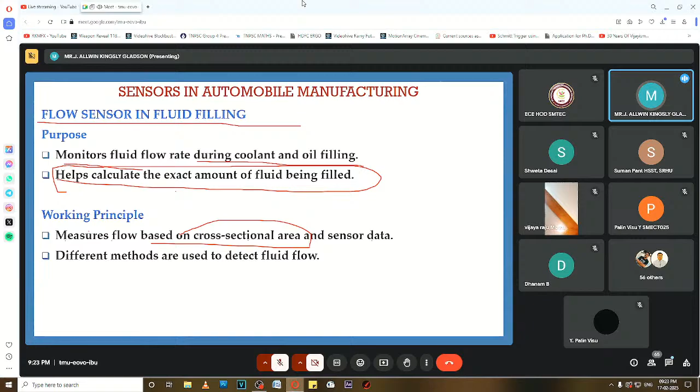The working principle is based on the cross-sectional area and the sensor data. It measures flow based on the cross-sectional area of the engine as well as the oil pump, using different methods to detect the fluid flow.

Types of flow sensors used are: mechanical flow meter, vortex flow meter, ultrasonic flow meter, and magnetic flow meter.

The mechanical flow meter uses a piston or turbine to measure the flow based on water speed. The vortex flow meter detects vortices created by an object in the fluid stream. The ultrasonic flow meter uses sound waves to determine the flow rate. The magnetic flow meter uses a magnetic field to measure the volumetric flow.

This ensures precise fluid measurement in vehicle assembly and prevents overfilling or underfilling of the fluids. This is very important because overfilling of the fluid is unnecessary, and underfilling of the fluid will lead to damage of the equipment.

The importance of sensors in maintenance of the assembly is crucial to the workflow. Sensors ensure a smooth and efficient production process. Any malfunctions can disrupt the operation and cause delays. What are the possible issues caused by a faulty sensor?

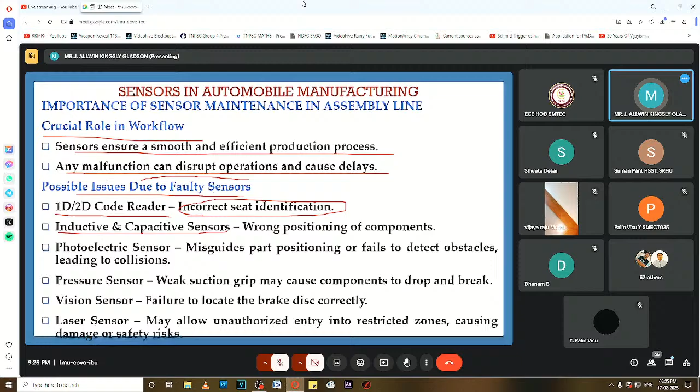If the 1D/2D code reader gets faulty, seat identification will not be correct. If the inductive and capacitive sensor becomes faulty, the position of the components will be wrongly positioned. If the photoelectric sensor does not work properly, it misguides the part positioning or fails to detect obstacles, leading to collision.

If the pressure sensor is not working properly, a weak suction grip may cause components to drop, fall, and break. If the vision sensor is not working properly, it fails to locate the brake disc correctly.

If the laser sensor malfunctions, it will allow unauthorized entry into restricted zones, causing damage or safety risk.

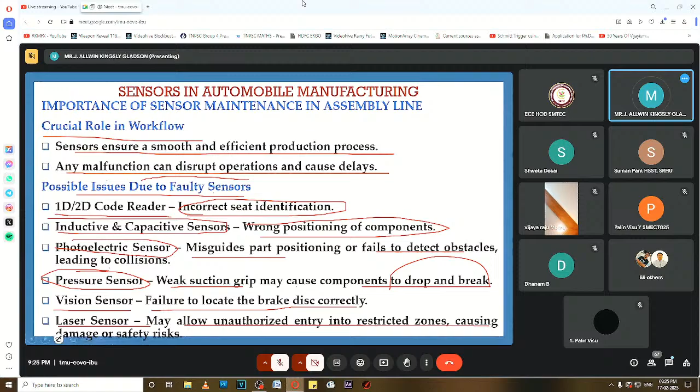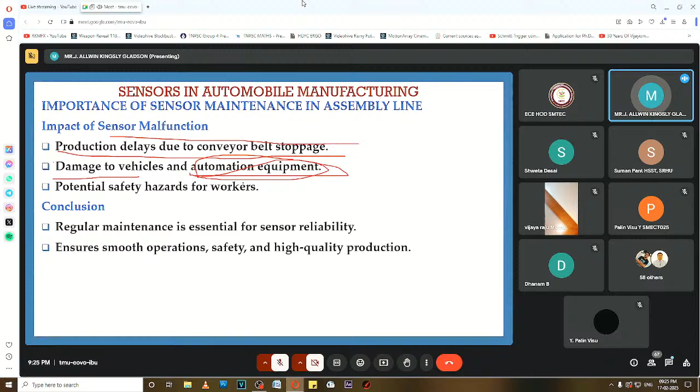Next, the impact of sensor malfunction. Production delays occur due to conveyor belt stoppage if the sensor is not working properly - the conveyor belt will stop, and therefore production will stop. There's damage to the vehicle's components and automation equipment and machineries involved in the production process. Potential safety hazards for workers are also possible if the sensor malfunctions. Regular maintenance is essential for sensor reliability and to ensure smooth operation, safety, and high quality production.

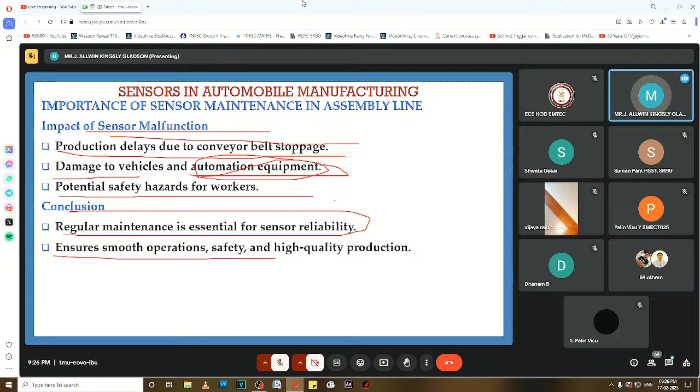For tire pressure monitoring sensors, there are two types: direct tire pressure monitoring sensor and indirect. The direct type uses MEMS-based pressure sensors and RF transmission to monitor tire pressure. The indirect type uses the wheel speed sensor to detect underinflation.

Battery-based tire pressure monitoring system is mounted on the rim of the wheel. It includes a battery for the power source, a MEMS-based pressure sensor, a low power microcontroller, and an ultra high frequency transmitter.

It consists of key components: acceleration sensor, pressure sensor, and voltage sensor. The acceleration sensor detects wheel rotation to identify the left and right tires, and activates power saver mode when the tire stops moving. The pressure sensor measures tire pressure and works with the temperature sensor to monitor heat levels and prevent overheating. The voltage sensor monitors the battery life of the tire pressure monitoring system.

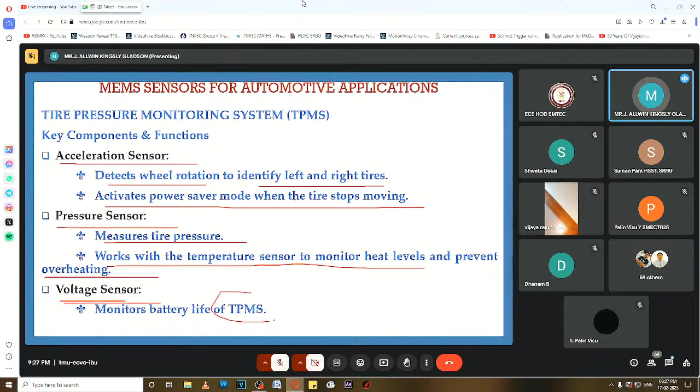Another key component is RF signals, which help differentiate front and rear wheels based on signal strength. For TPMS design and efficiency, MEMS technology is used for compact size, with an integrated lithium battery to power the system. Advanced localization techniques improve tire position accuracy and system efficiency.

Next, MEMS-based engine management system. It is used to reduce tailpipe emissions, using a microprocessor-based engine control unit to maintain a fixed air-to-fuel ratio. This reduces unburned fuel and optimizes combustion efficiency, which is very useful for vehicle performance.

Airflow and exhaust monitoring: this feedback sensor monitors the air intake into the engine and the exhaust from the silencer. Mass airflow measurement methods include the direct method, which uses a hot wire mass airflow sensor, and the indirect method, which uses a manifold absolute pressure sensor and an electroceramic sensor at the exhaust. These are the sensors used in the engine management system.

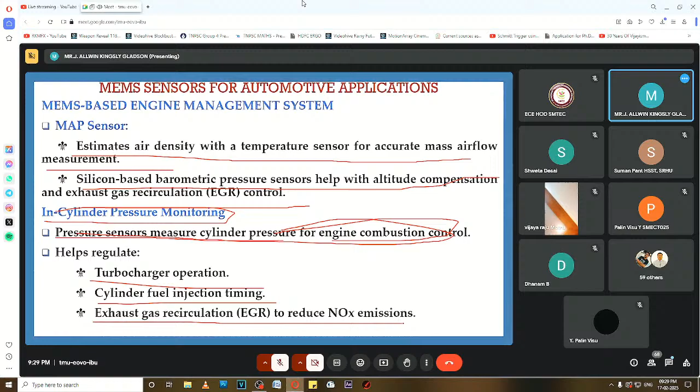In MEMS-based engine management system in-cylinder pressure monitoring, piezoelectric ceramic sensors are used. These are used in diesel engine glow plugs to monitor high cylinder pressure.

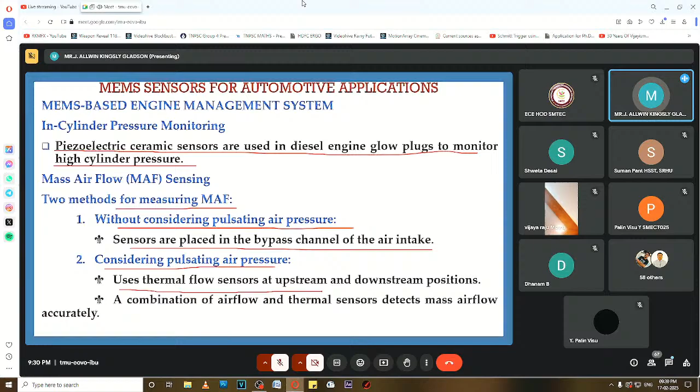There are two methods of measuring mass airflow: one without considering pulsating air pressure, and another considering pulsating air pressure. In the first method, sensors are placed in the bypass channel of the air intake to calculate airflow. In the pulsating air pressure method, thermal flow sensors are used at upstream and downstream positions. A combination of airflow and thermal sensor detects the mass airflow correctly.

That's all about the types of sensors in automobile and aircraft applications.